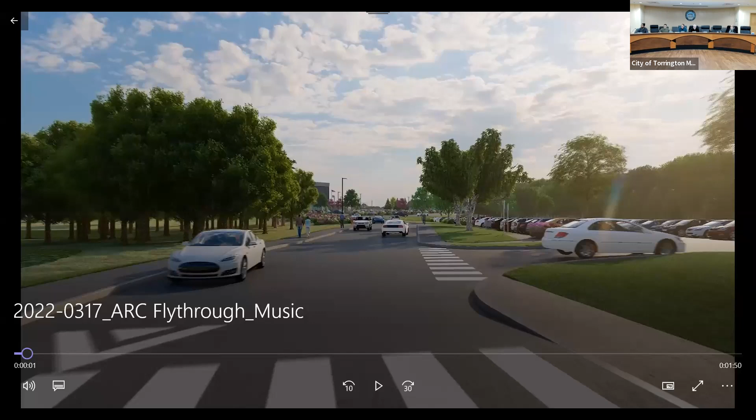So first, if I could, we'll play a quick animation showing the overview of the project. This is going to start at the entrance at Major Besse Drive, and then it'll fly around the building so that you get an idea of the project.

But before I do that, just to give you an overview, and I think you've seen the drawings, this is a building for the middle and high school, 7th grade through 12th, that will replace eventually the existing Torrington High School on the same site.

For the duration of construction, we'll be building the school in the parking lot of the existing high school, and then we will move, over a summer, the high school into the new building, demolish the existing building, and then complete the construction and renovate the site.

So we'll share some site plans. We'll get into details about stormwater management and traffic and plantings as soon as I share this video first, if you don't mind. Thank you. Okay.

The new building on the new site. The existing stadium field will remain and will be in use throughout the construction and remain in place after construction as well. And then we'll be adding to the school other amenities, including 2 baseball fields, 2 softball fields, and a multi-purpose field. And 4 tennis courts will replace the existing 4 tennis courts.

And there's an alternate for the project to do 6 tennis courts if budget allows.

Zooming in on the building, you can see the high school wing is the curved wing that faces Route 8 and Besse Pond. That wing is 4 stories with a partial lower level, which has access to the pre-K parking lot.

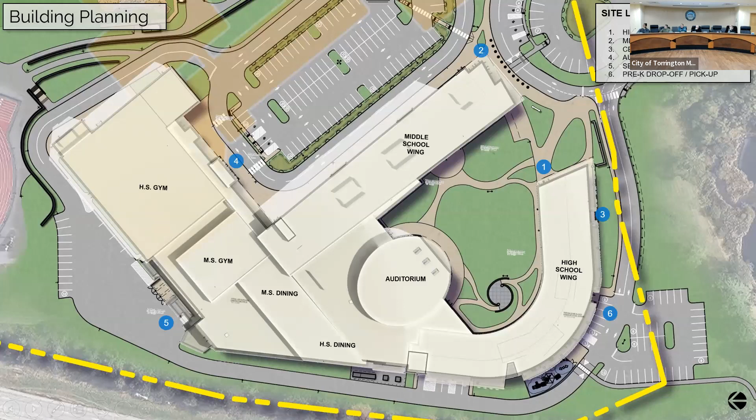Amy, I have a question - this is Diane Carroll. In both the middle school and high school wings, is it just all classrooms, or are there going to be shops, like the old Torrington High School has? Is there anything like that offered or going to be built? Sure, yes. The school has a robust program of pathways, and some of those are in the tech ed department, including construction technology, an engineering lab, some graphic labs and support spaces for digital design. The auto shop is also considered one of those tech ed spaces.

Is that just in the high school wing? Those are the high school ones. The middle school has 2 maker spaces and a digital graphics engineering area, kind of at a smaller scale. Okay, great, thank you.

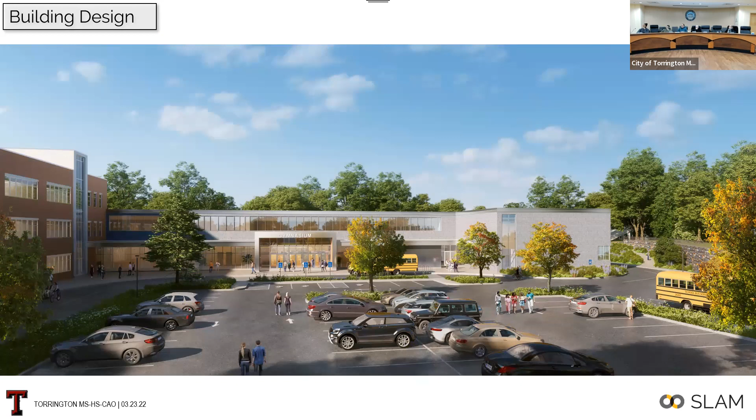This is an image of the gymnasium entrance or the assembly wing entrance. This is where the bus drop-off would let students off in the morning and pick up in the afternoon, but it's also where we expect visitors to come for basketball games, events in the auditorium, and that sort of thing—any kind of use of the building after hours.

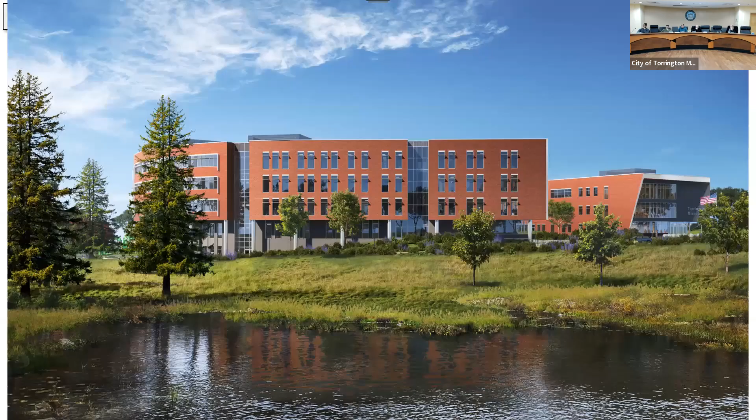This image is taken from Besse Pond, showing the full 5 stories because you can see the lower level of the high school there. Coming around the corner, there's an elevator and stair tower that serves the high school on that side. And this is an image of the middle school wing, 3 stories, a little bit intentionally smaller scale and only serving 2 grades.

Both academic wings are primarily brick exterior wall surface. We have some metal panel to highlight the entrances and curtain wall, as you saw. And then we have a polished concrete block for the gymnasium wing and around back, and also for the auditorium. So any questions on materiality? I do have an exterior material board that you're welcome to view.

Heavy. Amy, I have a question. Sure. Yes. Go ahead, Donovan. Thank you. Thanks, Greg.

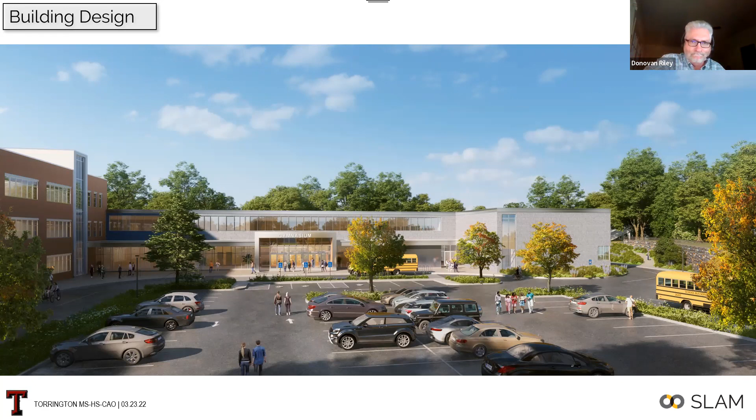Thank you. Thanks, Amy. Sure. Yeah, so I can turn over the presentation now to landscape and civil engineers, and they can get into more detail about the site. Please. Thank you, Amy.

Hi, good evening. My name is Henry Withers. I'm a licensed landscape architect in the state of Connecticut and a member of the SLAM Collaborative. I've been working with Amy and the design team and Will to help design the site. We've actually been working with Jeremy and the city staff as well on some of the logistics that we'll get into in a little bit.

Amy gave you a general overview, and I'm going to try to keep my overview to more of an executive summary as well, because you've already heard some of this, but I just want to make sure that you're aware of everything going on.

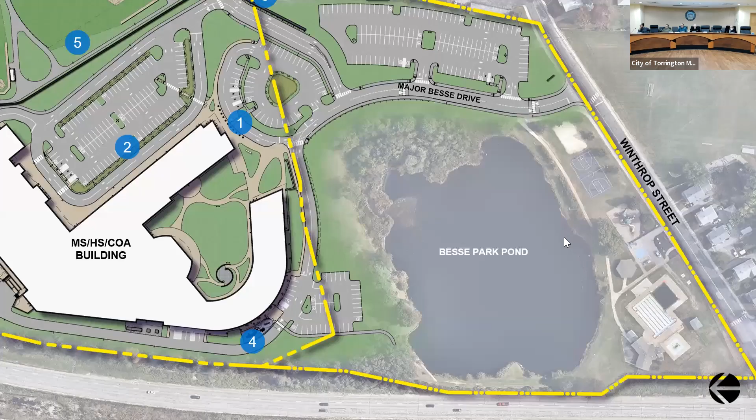It's about 6:30 where that number 4 is. We can see it. Yeah. There we go. Ah, beautiful. Thank you, Ken. Maybe I'm doing something wrong. This one, it's the red - there we go. Yeah, got it. So that's it right there.

So one of the nice things about this, as Amy mentioned, is we are looking at keeping the existing school open. Right now we're working with Jeremy and city staff, fire and police too, and ONG to understand how that's all going to happen. But we will be able to construct this project down in this location and keep the school open.

When it's done, the nice thing about this project is it consolidates all the athletic fields up above and keeps all the school facilities down below. Very nice connection to Besse Park. We have a nice greenscape along here that we're leaving sort of open, saving some of the existing large pines that are down in that area. That's again where the little playground is down there.

Service into the back, wood shop down here and the auto shop here, all sort of on the back side of the building, but very convenient and very useful locations.

The shared parking here is, as you know, there's two parcels, the Besse Park parcel and the school parcel, totaling around 34.94 acres. We are sharing some of the parking with Besse Park. This area becomes faculty parking, but also serves Besse Park, especially during the busier months during the summer. So there are crosswalks provided both here and here at this parking lot that serve both facilities. There's a sidewalk that connects on both sides all the way around, and then feeds into Besse Park.

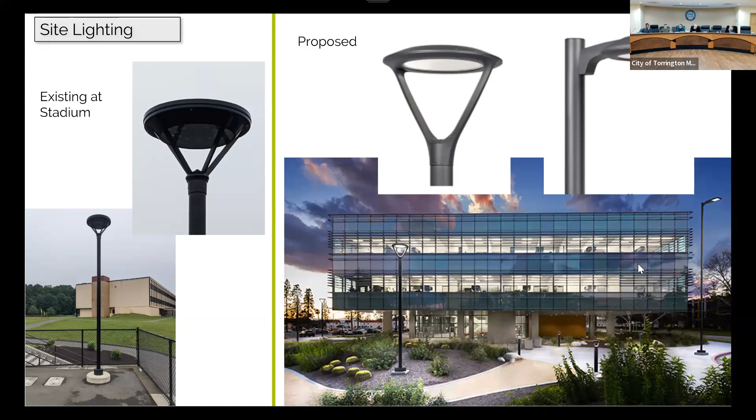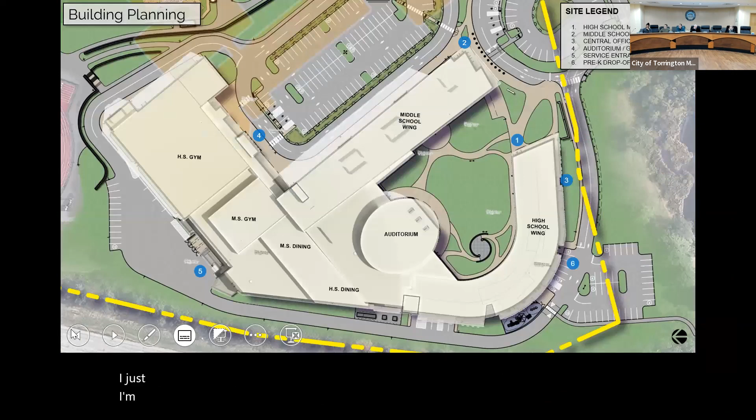I don't know, Amy, if you want to bring it up on one of the site plans—I think you probably saw it in the fly through. It's located on the mound, that little orange dot right there. So that way it'll be seen by a number of people coming into the site, every morning by the buses coming in and dropping people off.

Another question, yes sir. You have a lot of roof—did anyone consider solar?

Yes, while it's not afforded by the project, we're planning to put enough panel capacity and locations for inverters on the building and conduit in place. Our engineers have come up with the KW capacity, so that'd be like a separate project.

That's really not going to be able to be part of this. It could be a separate project, or a PPA provided by the solar company. But it's not going to be part of the actual—the funds to do that can't come out of the building funds. Correct, right. But structurally, the building is set for that, the added load and so forth.

Absolutely. And you've communicated with the Department of Energy on potential future projects? The state has several different programs which the governor has been working on towards green buildings, making sure we're meeting the state's energy efficiency goals. As part of the state project and funding requirements, we are meeting the equivalent of LEED Silver, which is what the Connecticut High Performance building requirements are, and we're proceeding with that.

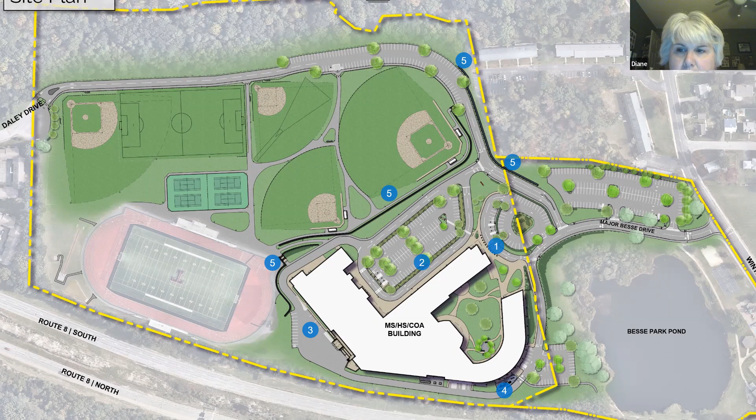Like not so much a community garden, but raised beds? Yeah, actually, we just discussed that, and that's something we'd love feedback from the building committee on. We could certainly - the idea came up - do a victory garden. We've done that in different schools, and it depends on the teacher taking care of it as to whether it becomes a weed bed or a garden. But it's certainly a possibility, and maybe there's a better location for it where the flexibility and how much it's used won't be as critical.

This will be fairly used space and a nice viewing area from all the classrooms, as well as - it's graded in a way that lets people sort of sit on an embankment and look at presentations. The ARC was interested in us leaving this middle part open. We're going to shift some of these trees out a little bit so we could leave the middle part open, so that if they wanted a larger white tent or something for an event, they could do that. So we see that as a really useful multi-purpose space where any kind of event could take place that the school might want to offer, even to Acorn Ballet or whoever, as a possibility for presentations.

Quick question - thank you - for Amy. In the design, is there like a maintenance garage, if you will, or maintenance section for plant maintenance, so to speak, for outdoor maintenance and so forth?

There is, for mowers, et cetera - there's an outdoor equipment storage room which would be able to house some outdoor maintenance equipment, but primarily outdoor athletic equipment. I see, so that's easily accessed. The loading dock and custodial storage areas are also easily accessible from outside. Thank you.

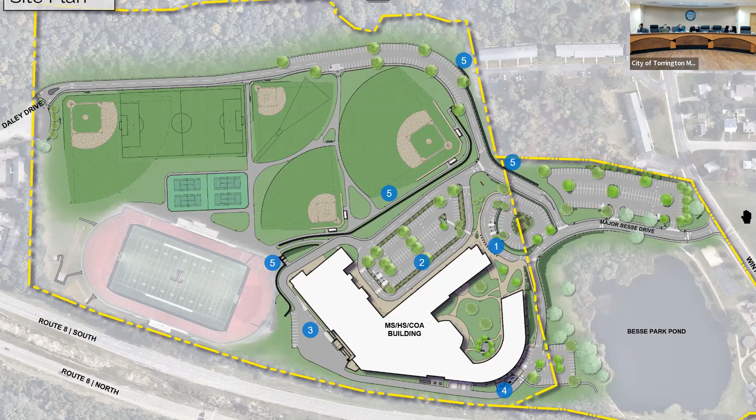Thanks, Amy. Good evening, commission members. For the record, Will Walter, professional engineer with Alfred Benesch and Company.

So the site topography generally slopes from east, which is the top of the page - there's Ruland Street up at the top in the residential areas, that's the high point. It comes down, going east to west, and eventually all the stormwater is discharged. There's a pretty large drainage swale that runs along the Route 8 right-of-way, on the highway side of the fence that separates the school from the right-of-way.

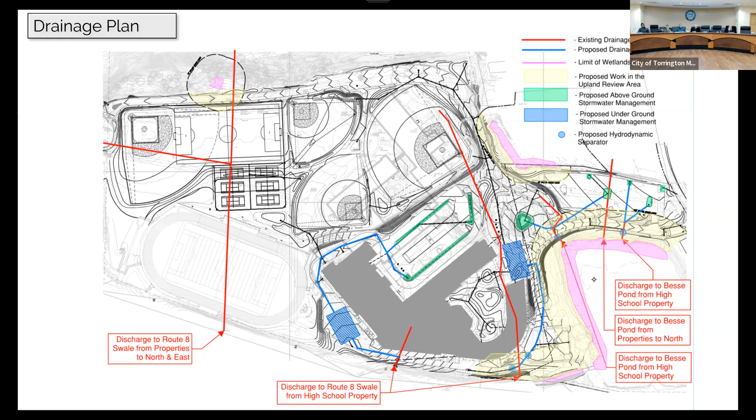It's that button right there. I honestly couldn't see it when you were pointing, so I don't know if it was going to be helpful.

There are two large pipes collecting flow from off the site that run underneath the site. One of them, the dark red line on the left side, collects flow from the Ruland Street subdivision as well as the subdivision to the left. It comes down and collects in the 36-inch pipe that goes underneath the field and then dumps out into that swale on the right of way. We're not touching that pipe, as it's conveying flow from off-site underneath the high school property and into the right of way.

And then on the southeastern part of the site, there's the little apartment area and then the roadway system to the north. There's a large, I think 54-inch culvert that goes underneath that parking lot and dumps out onto the bank of Besse Pond and goes into Besse Pond. We're not touching that pipe either, as there's nothing from our site that gets into that pipe.

The flows from Besse Pond come down and there's an overflow weir that, during larger storm events, overflows and gets into a swale that drains down into that large swale in the right of way. There's also two other pipes - pipe networks on the site that dump out through an 18-inch pipe and I believe a 24-inch pipe down into the swale as well.

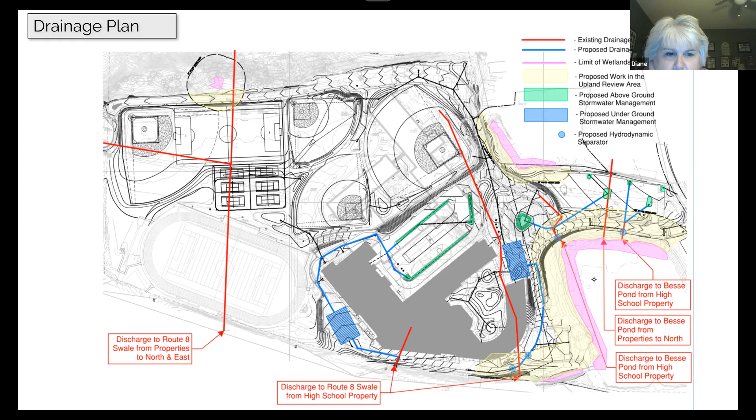I'm just thinking of the tennis courts. If those start to flood, is it going to deteriorate the material? No, those tennis courts are not going to flood.

So I guess just to focus in on the questions we had for the wetlands, can you zoom in on that, where that red pipe comes down and empties into the pond? You can see where that basin is, into Besse Pond, that's what we wanted, what we asked to get adjusted.

Yeah, so that's an older plan, but that's been adjusted, so close to that existing pipe. We have adjusted it, I just wanted to point it out to the commission.

So what we're doing is not the large 54-inch pipe, we're not touching that, but there's several other pipes that collect water from that parking lot and dump into Besse Pond. Right now it's completely untreated, the water flows over the parking lot with the pollutants and dumps out into Besse Pond. So what we're doing is we're maintaining the last 15 feet of pipe, but we're dropping hydrodynamic separators, which are swirl chambers, on those pipes so the untreated water is not going to flow through. It's going to be captured in the swirl chamber, and then clean water is going to come out.

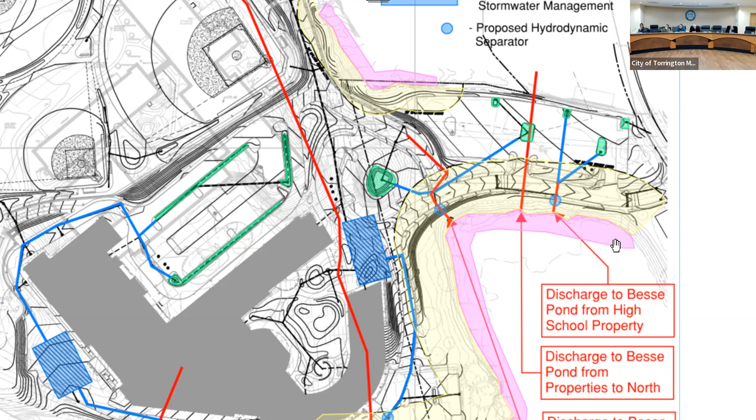Any other commissioners have any questions at this point? I've got a general question, maybe for Amy, Greg. Go ahead, Donovan, if that's okay.

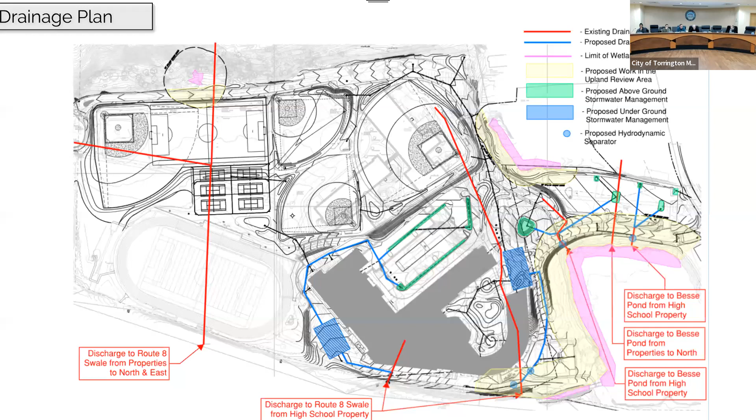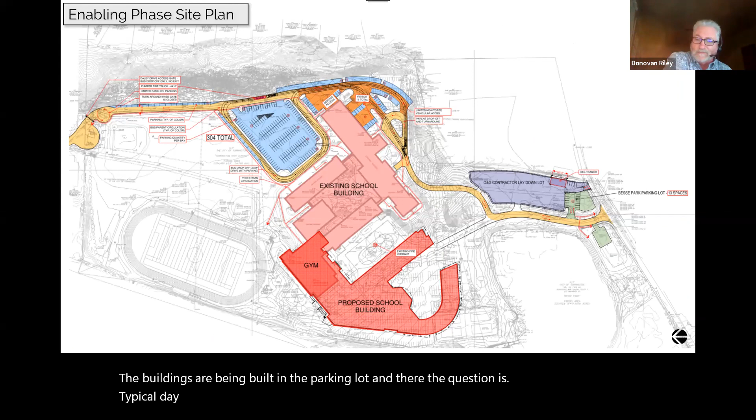Forgive me if this question's been asked at previous hearings, but what's the plan for maintaining an environment in which the existing students, teachers, administrators can continue to conduct their business while the buildings are being built in the parking lot? What's a typical day going to be like to use the facilities during the construction of the other parts? I know a lot of it's going to happen during the summer, but what's the timeline look like in that respect? And what's been built into the plan that is going to allow the teachers, students and administrators to continue to conduct business while the other construction is happening right next door?

Right, good question. And I pulled up a different site plan, the enabling site phase plan, which helps show the condition of the site during construction. If you can imagine the dark red new building under construction while the pink existing building is in use.

So we are trying to separate, or we will absolutely separate, the construction activity from any school activity. There will be fencing, unfortunately not shown on this graphic, but between the construction area and the existing building. That construction fencing will be in place immediately starting this summer before construction begins, and it will delineate the difference between the construction area and the school.

O&G, as the CM, will also put into place a number of security measures, including background checks on all of the contractors, each individual from each subcontractor. And they will implement badging systems so that only background checked personnel is on site. But even those folks will be required to stay within the construction fence zone.

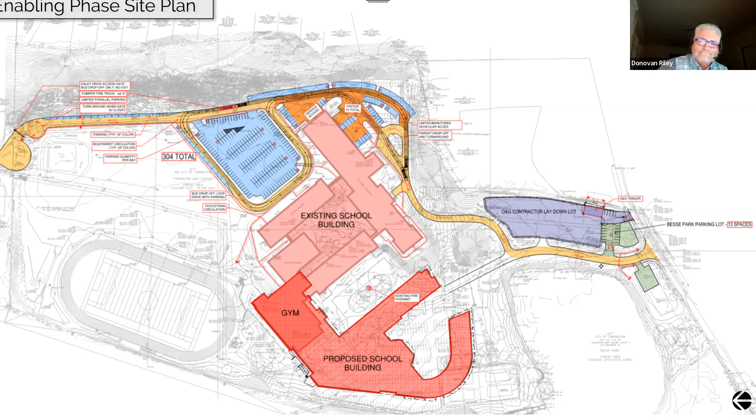Great, let's move on. Thank you, Amy. So I think we have a traffic presentation that we want to include that was a part of our submission to you. Thank you.

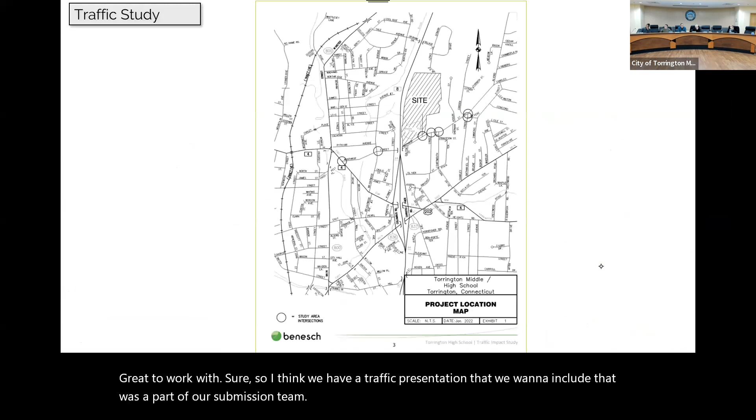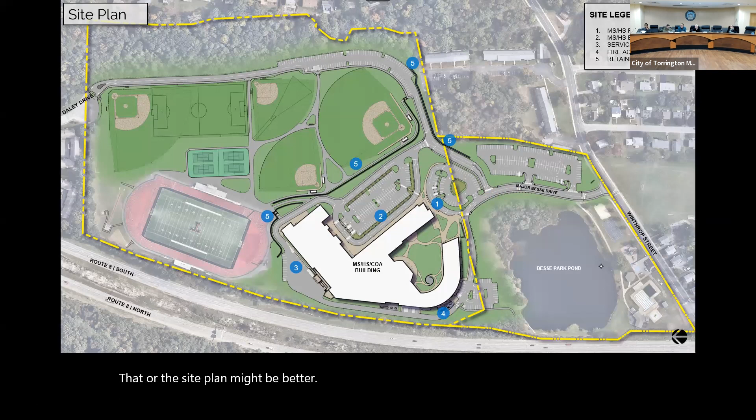Good evening. My name is Steve Allman. I'm a professional engineer in the state of Connecticut. I'm the traffic engineer on this project. I'm employed by Alfred Benesch and Company. We did the traffic study for this development, the new high school and joining of the middle school and the high school.

As you know, the high school is currently located off of Major Besse Drive, which is accessed via Winthrop Street. In the vicinity of the site, Winthrop Street is classified as an urban collector roadway. At Major Besse Drive and Winthrop Street, it's a three-way stop control, one lane in each direction for each approach. At the other side streets along Winthrop Street, the side streets are stop controlled and Winthrop is generally a through movement. There are a couple of all-way stops in the vicinity of the site. Speed limit on Winthrop is 25 miles an hour in the vicinity of the school.

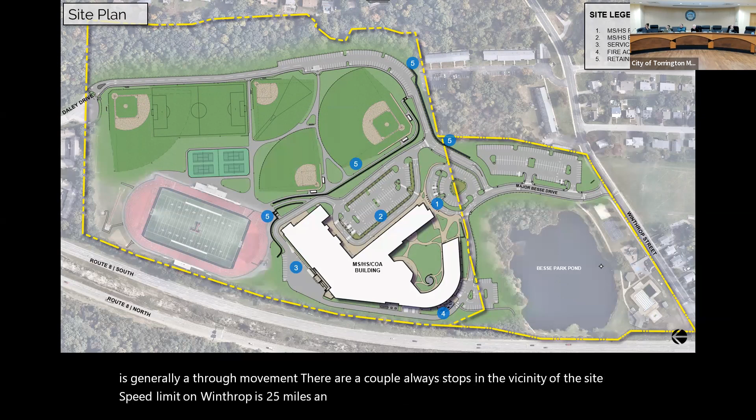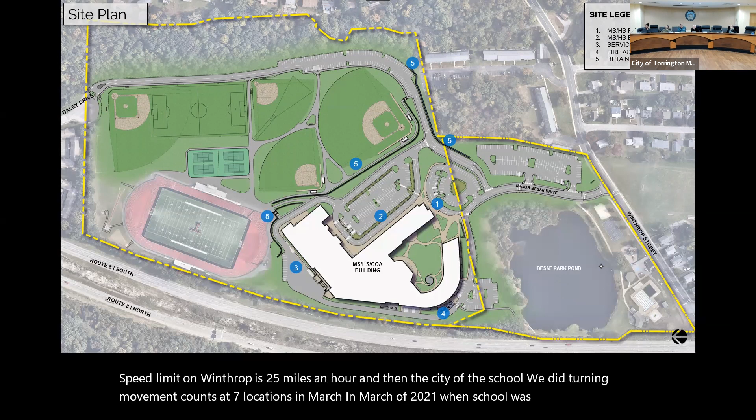We did turning movement counts at 7 locations in March of 2021 when school was in session. The locations were Winthrop at Major Besse, Winthrop at Amherst, Winthrop at Dartmouth, Winthrop at Charles, Charles at Revere, Winthrop at Brightwood, and Winthrop at East Elm. We also did 24-hour counts on Winthrop in the vicinity of Dalton Street. I'll get to that in a second.

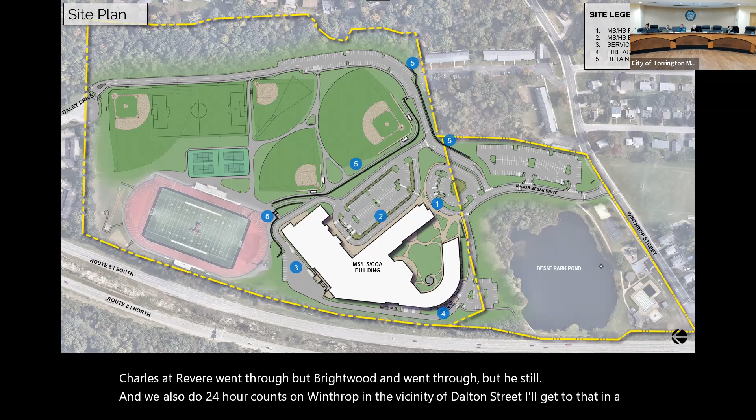We also reviewed the latest crash data from January 1st, 2015 through December 31st, 2020.

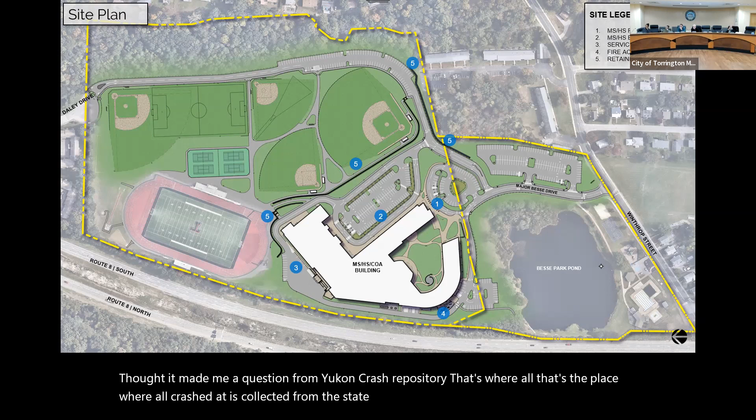From the UConn Crash Repository, that's the place where all crash data is collected from the state and collated. Review of that data shows there are no crash patterns along the streets in the vicinity of the site or at the intersections studied that would indicate a geometric or any improvements are required.

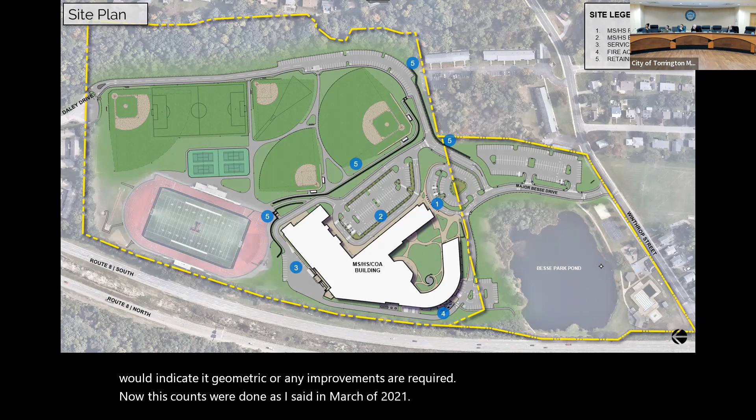Now, these counts were done, as I said, in March of 2021, still suffering the effects of COVID, the pandemic. During the pandemic, we know that traffic volumes have been reduced due to changes in traffic pattern, people working from home, et cetera.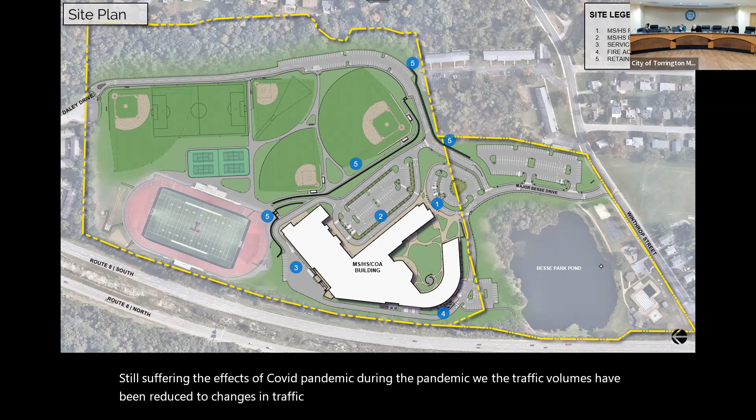Comparing the counts, the 24-hour counts we did on Winthrop Street and the DOT counts done in 2018 along Winthrop Street, we find that we need to take those 2021 counts and expand them by 7.2% to equate to the old 2018 counts. So we were 7% lower than 2018. By increasing those volumes by 7.2%, we came up with 2021 volumes adjusted to pre-COVID numbers.

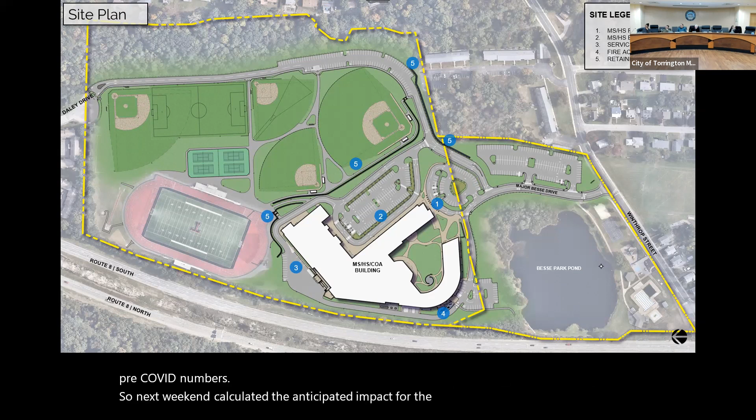Next, we calculated the anticipated impact by the school. The school impact new trips is going to be generated by 3 different components. First, they're anticipating an additional 137 high school students than are there presently now. We are moving the middle school, grades 7 and 8, to the school, and we're moving the school administrative offices to the site.

We calculated those new trips. For the middle school, we actually counted the middle school. So the number of trips that I have anticipated is for the full middle school, which is a bit conservative because that's 6 through 8, and we're only moving grades 7 and 8.

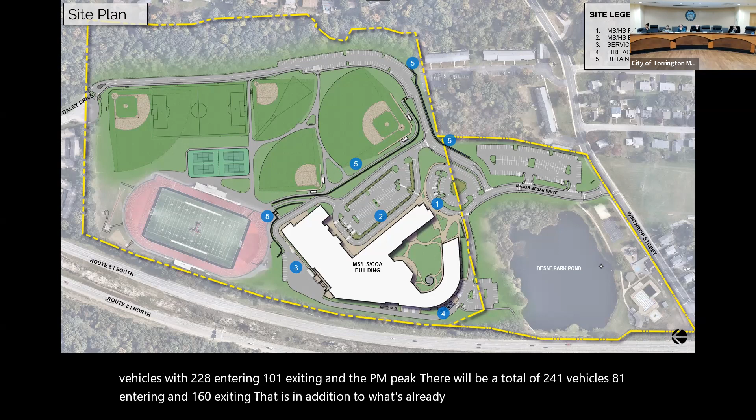The anticipated number of new trips to the roadway network by this project is, in the AM peak, 329 vehicles with 228 entering, 101 exiting. And in the PM peak, there will be a total of 241 vehicles, 81 entering and 160 exiting. That is in addition to what's already out there on the network going to the high school today.

As I stated, these are conservative because they include the full amount of trips being generated by the current middle school, but we're only moving grades 7 and 8. Therefore, this creates a conservative, or worst case scenario, for the school.

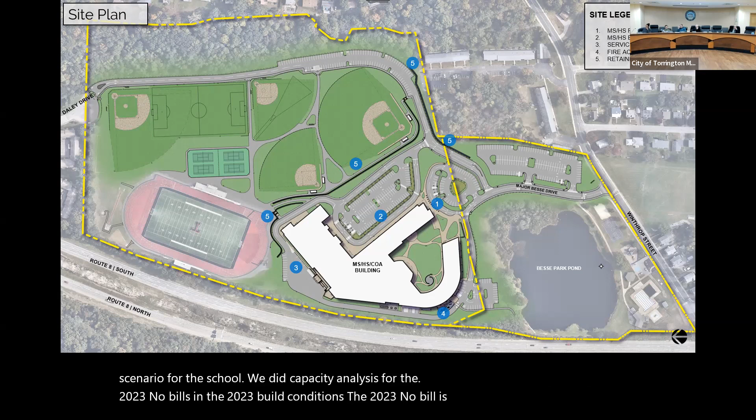We did capacity analyses for the 2023 no build and the 2023 build conditions. The 2023 no build is the amount of traffic we anticipate on the roadway network in 2023 without the school being improved. That would be, we go to 2023, we don't build a school. What's the traffic level there? That was calculated by taking those 2021 adjusted volumes and increasing them by 1% per year for 2 years.

And the 2023 build volumes are those no build volumes, adding those generated trips I just told you onto the roadway network.

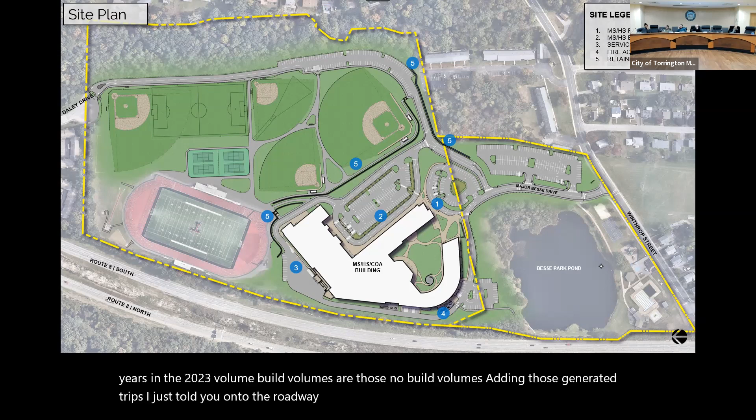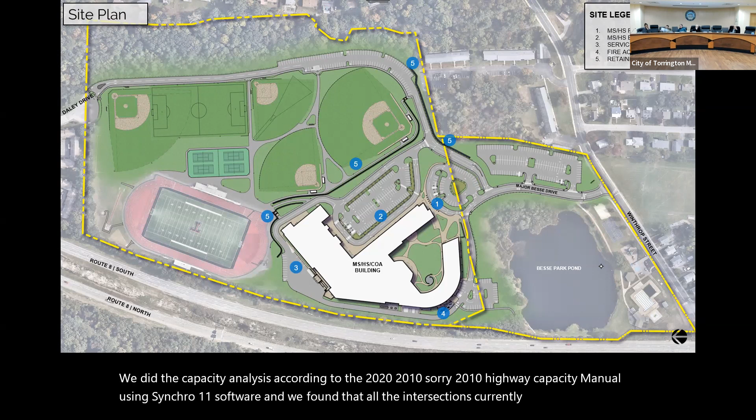We did the capacity analysis according to the 2010 Highway Capacity Manual using the Synchro 11 software. We found that all the intersections currently operate, and in 2023 will operate, at a level of service C or better with no build volumes, and will continue to operate at level of service C or better with the build volumes. All of the side streets will continue to operate at acceptable levels of service.

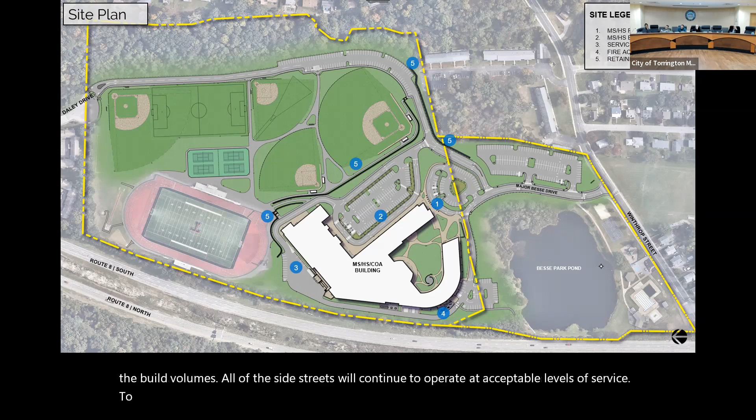To note, the Major Besse Drive to Winthrop Street is analyzed as a single lane approach. We're not creating 2 lanes there. This was based on a field meeting we had with the traffic lieutenant.

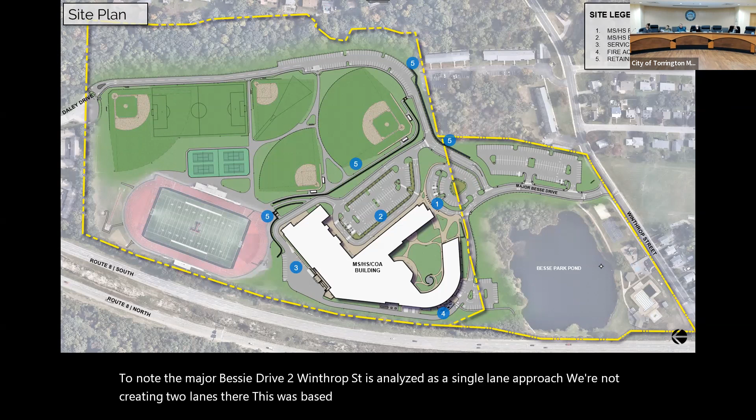He had concerns, as I do, about making that exit drive 2 lanes. We have a school bus on one side, a car on the other side. You can't see, even though it's a 3-way stop. It will operate acceptably as a single lane exit.

So that is what is proposed. That road is one way out. Major Besse is 1 lane out, 1 lane in. Okay, so it's just single lane exit, like it is today. Correct, no change from today.

There was discussion of buses. You're gonna have buses coming in that way. In the final condition, the majority of the buses are assumed to use Major Besse. Probably a half, maybe a third of the buses are assumed to use Daley. So you haven't considered having it more exclusive, the site being more exclusive regarding bus traffic.

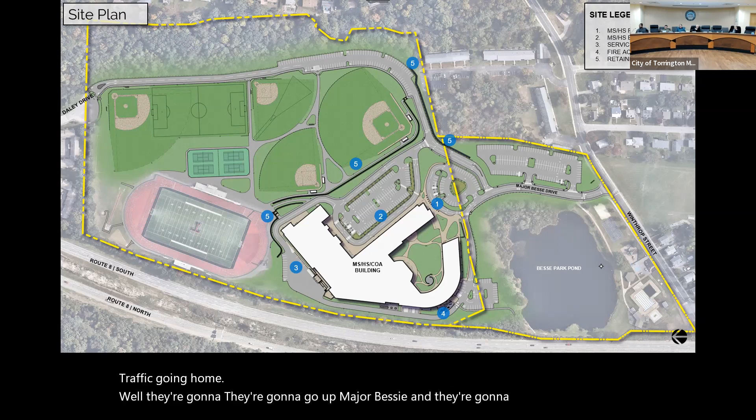In other words, keeping bus traffic away from parent traffic or student traffic on site. You have Daley Drive in the back. Well, they're going to go up Major Besse and they're going to split. I see, that's exactly what you'll have to do. Yeah, split.

But the big concern I have on this is I'm looking at it, and I'm sitting there saying, if buses are going to access through Major Besse Drive, then you're going to have the same issue as you had indicated, you have these trucks or buses blocking view, and they're competing for the same access to the building as parents, and also students.

That's as it is today. I'm asking if that's the way it's going to be. I know how it is today. My concern is what's the plan for the actual site movements once the buildings are finished and you've got it all done.

I don't know if this plan is for everyone to enter. The majority of the buses and the parents will enter here. The parents will come up here and use this loop here. And the buses will continue to loop around the school the same way.

How many buses are going to be coming, and exit at the same time? Let me just interject just for a moment, because it may clarify. Maybe answer the question: is the high school start schedule the same as the middle school? Yes.

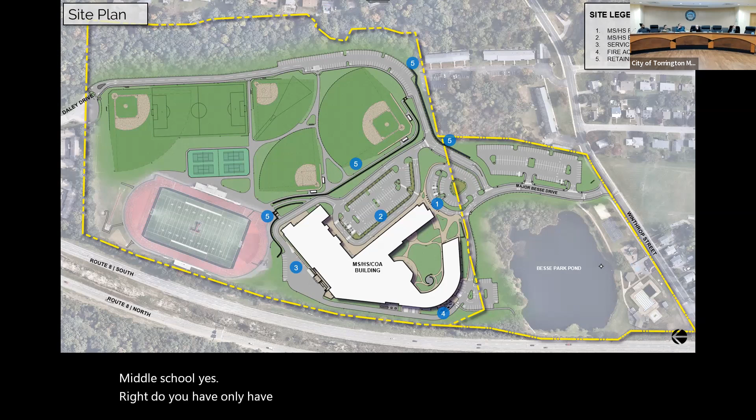That being said, we have everybody coming at the same time. Okay. You only have one cohort of buses. I apologize, just to say my name for the record.

Ed Aram, Torrington resident, 43 years. I look young, Ed says.

Yeah, majority of the buses will be coming in on Daley Drive because on the east end, there may be 5 to 10 buses that will come through. Right now, as you know, all the buses come through Major Besse Drive. When this is built, the north end and the west end will be able to come through Daley Drive.

And only probably 10 buses will be coming through on Major Besse Drive, exiting back out that way. Well, that I don't know yet. Okay, but I know that the majority of buses, because they're on the north end and the west end, will come through Daley Drive. So the plan, Ed, is that the north end and west end will come through Daley, and then the east end will come through Besse.

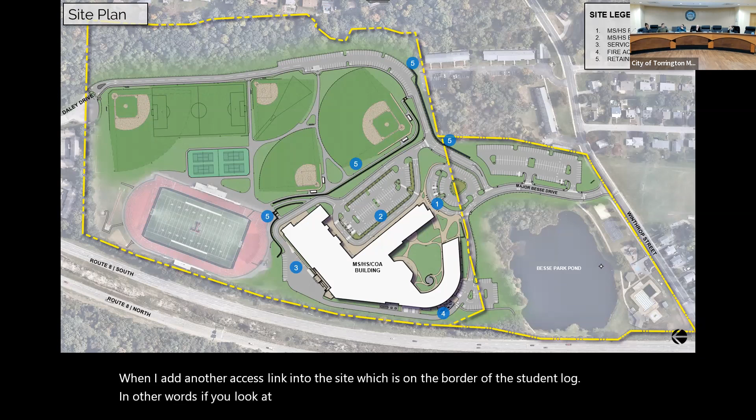Correct. I had one thought, and when I looked at the site plan, the first thing that jumped out at me was, why not add another access lane into the site, which is on the border of the student lot? In other words, the first lot coming in from Besse, where the skate park is.

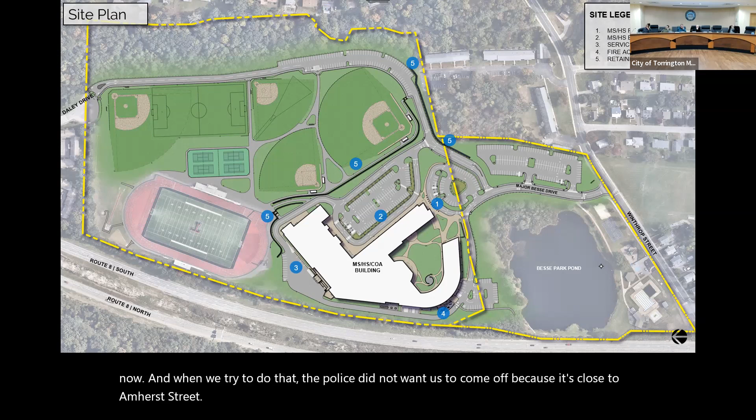If you were to encroach on that a little bit and put in a bus lane, that bus lane shoots right into where it's got to go, no turns. If there's a lane there now, when we tried to do that, the police did not want us to come off because it's close to Amherst Street. So they didn't like the intersection. We wanted to do that, we wanted to have that lane there.

Excuse me? I thought you had more influence in that. Yeah, maybe if you looked younger.

We tried to do that. I looked at that as a huge improvement to the circulation. I know buses take a direct shot into where they've got to go, but because of Amherst Street right there, it was too close to stop, and one of those staggered intersections. Not a good intersection.

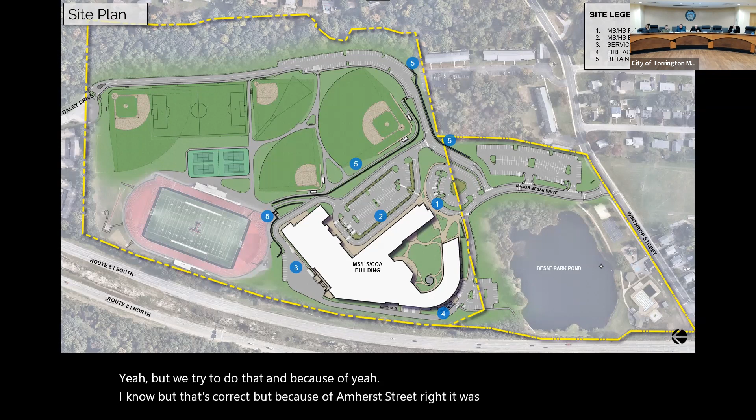The other issue that the police chief and the traffic lieutenant had was people building up, having gathered speed coming down the hill, and not having enough time to stop. That was really the reason we had our field meeting. We had originally proposed the two driveways and they didn't want it, and so that's where this came up.

I'm just trying to get the bus traffic away from the car traffic as quickly as possible on Besse Drive. I would look to split that Besse Drive off sooner rather than wait till you get to the circle. Although the other issue we're dealing with on the site is we're limited on where we can put parking. I understand. It really is, for the size of the site, and it looks like a large site, it's really tight to get all the program into it. I'm sure the administrators will try to solve it as best as possible.

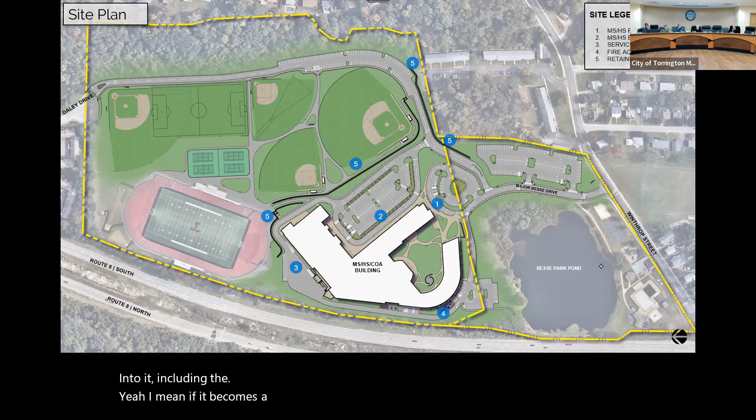If it becomes operationally a problem, they can certainly put all the buses onto Daley. They're going to do it during construction, if that is operationally what is best for them. It's not as efficient, it's an option. Certainly efficient for the east side, but it doesn't, it's not as efficient for the west side.

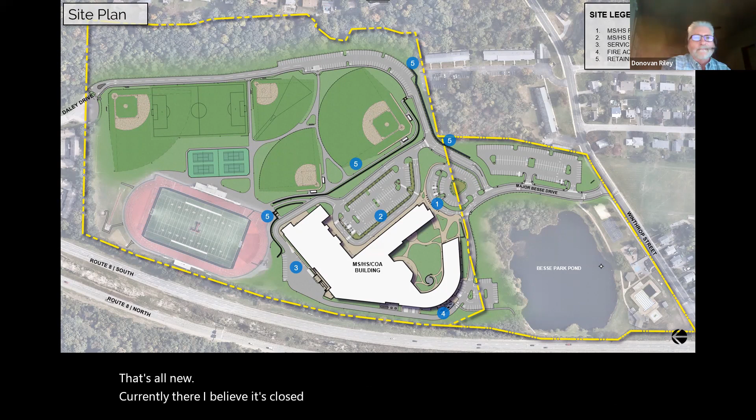Donovan, did you have a question or comment? I just, the Daley Drive entrance, that's not active now, right? That's all gonna be new? The Daley Drive is there now, currently there. I believe it's closed at this point. There's a fence across it right now.

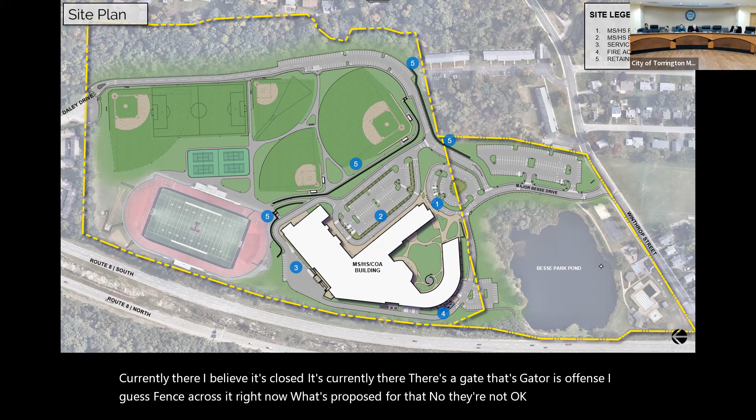So nobody's proposed for using that now, right? No, they're not. Okay, so after it's all done, we're gonna have a lot more buses coming in through there. So they're not all gonna come in through Major Besse. No, well, probably at least half or more. I've been informed we're coming in through there. That will be gated, actively gated, so that only buses can use it. If you're driving a car back through there, you're not gonna be able to get through it.

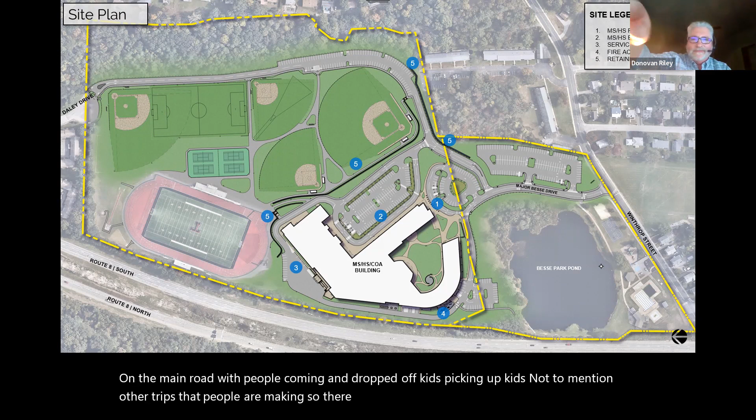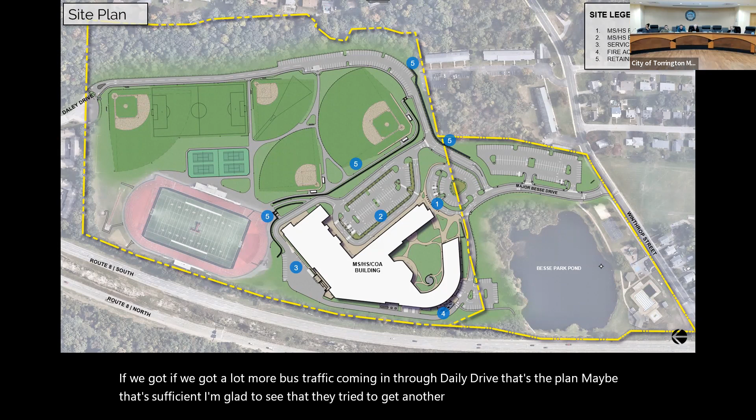Does that address a portion of your concern, Greg? Yeah, I'm glad Ed clarified that the administration is gonna look at trying to minimize the bus traffic coming in from Major Besse Drive, because there's too much competition on that main road with people dropping off kids, picking up kids, not to mention other trips people are making. The concern previously was that hill, you could theoretically get a backup that would still affect the ability to stop on the side of the hill. That's a heck of a hill. If we've got a lot more bus traffic coming in through Daley Drive, maybe that's sufficient. I'm glad to see they tried to get another road in. I'm happy you at least attempted to see if you could get that done, and obviously you can't, but.

So that is one benefit of the site, that you have that flexibility. If they find they need to use Major Besse for some of the buses, they can. Obviously dating myself, but when I used to park in that parking lot as a student, there was an exit there directly out, and I think it's still there.

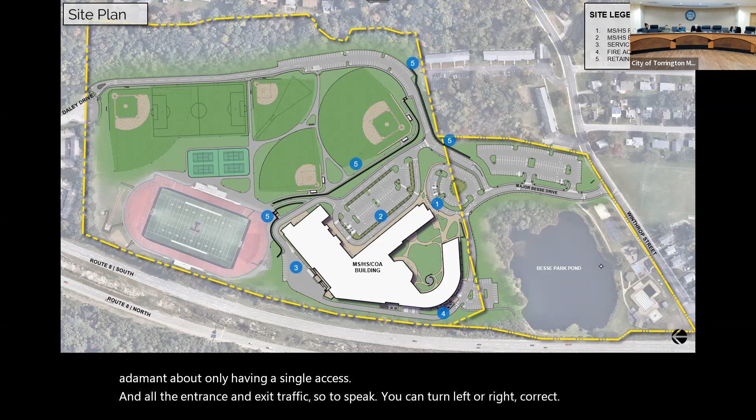So I guess maybe that's one of the reasons why the police department would like you to cut that off too. Yes, they were adamant about only having single access. Okay, that's fine, I get it. And all the entrance and exit traffic, you can turn left or right leaving the site. It's a three-way stop as it is now, I guess it was changed a couple of years ago.

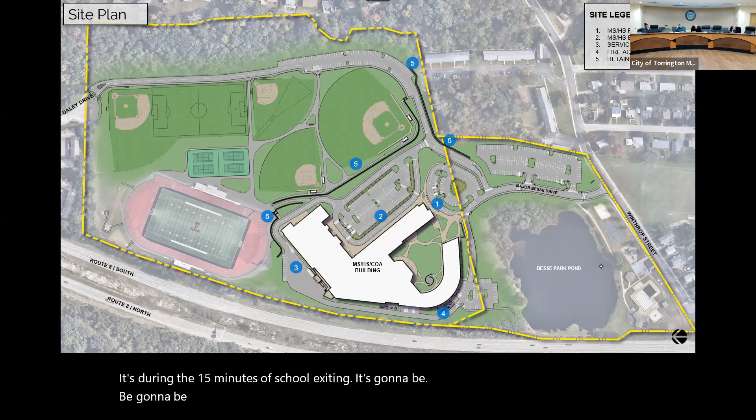Has anyone ever thought that there might be a reason why you might need to direct traffic at that corner at any point in time, based on the counts coming through? During the 15 minutes of school exiting, there's going to be backups, a lot of traffic, but it's only going to last 15 minutes. It's an all-way stop, so it should be self-regulating. The analyses show that the queues won't be significant.

Maybe you can get a policeman to direct traffic if needed. I'm sure they'll be notified if there's an issue, though it'll probably be overtime.

Any other commissioners have any comments or questions? Okay, I'll still be here. Thank you, sir. Amy?

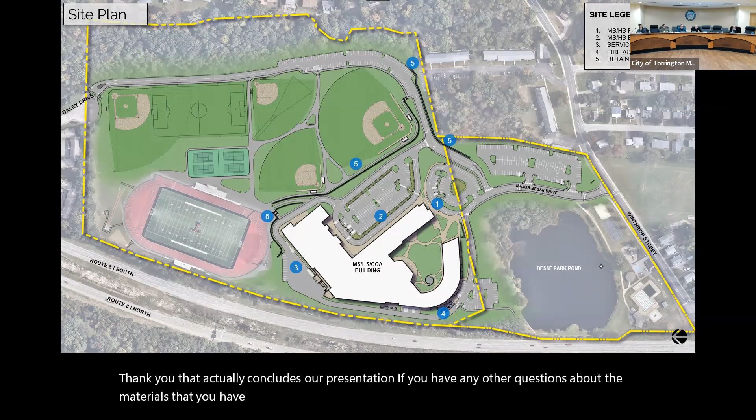Thank you, that actually concludes our presentation. If you have any other questions about the materials, or would like me to review anything, let me know. We kind of did the enabling phase, which is during the construction phase, midway through. Right, okay, thank you.

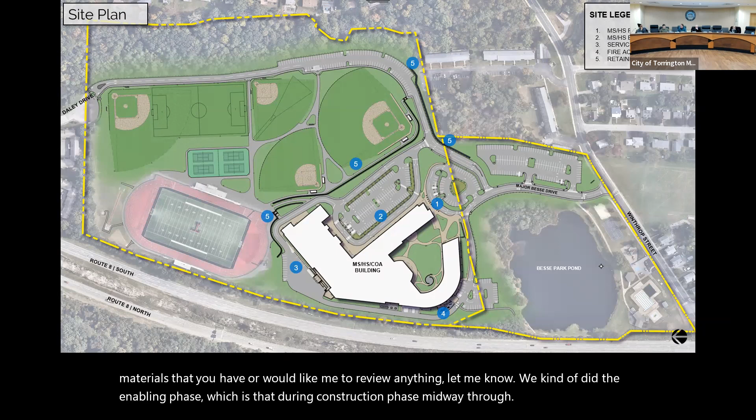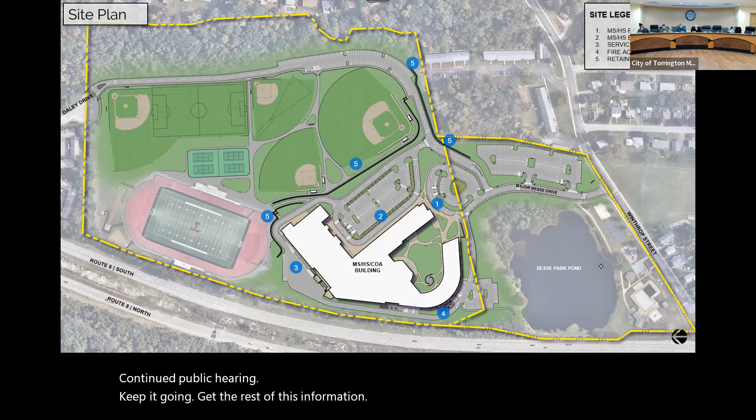Jeremy, a few comments please. As we can see, this is a fairly large, involved project, so we still have a couple other boards. I did distribute a draft memo that I started to put together, but we are waiting for complete reviews from the city engineer, the police traffic sergeant, the fire marshal, WPCA, and the building official still. That being said, Jeremy, I think it's conducive to continue the public hearing and keep it going, get the rest of this information presented at a follow-up meeting. Yeah, that'd be my recommendation.

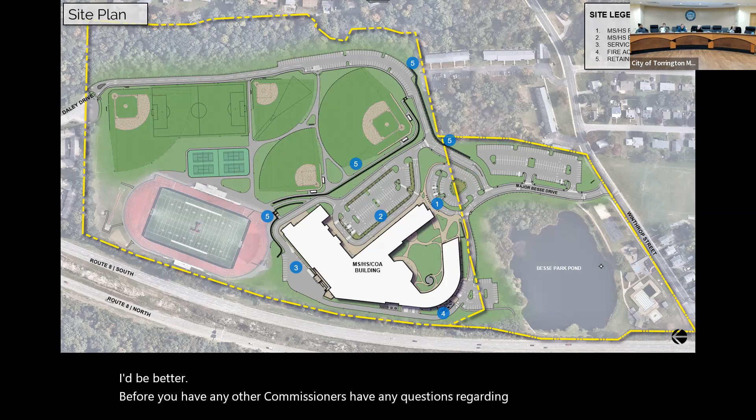Before we do that, any other commissioners have any questions regarding the information proposed this evening? I think the only thing I'm thinking about is with Daley Drive is the impact to that small condo community that's right behind it. I don't know what we're going to face when the buses start coming through there. So it's just something to keep in mind, you might have some pushback there.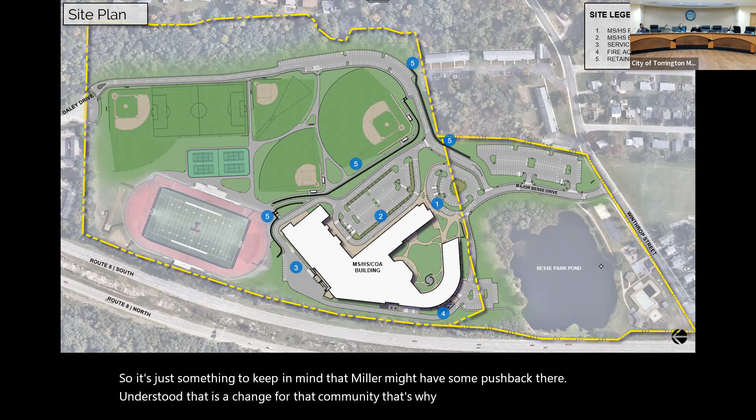That's a good point, Star. Understood, yeah, that is a change for that community. That's why we're going to be very careful about the timing of the gate. The gate at that Daley Drive entrance will be controlled by the automated building system, and it will be unlocked only for probably a half-hour duration, in the morning and then again in the afternoon. Otherwise, there will be no through traffic.

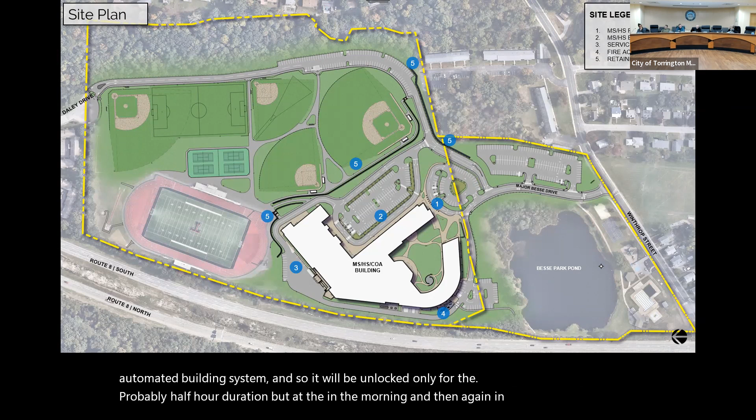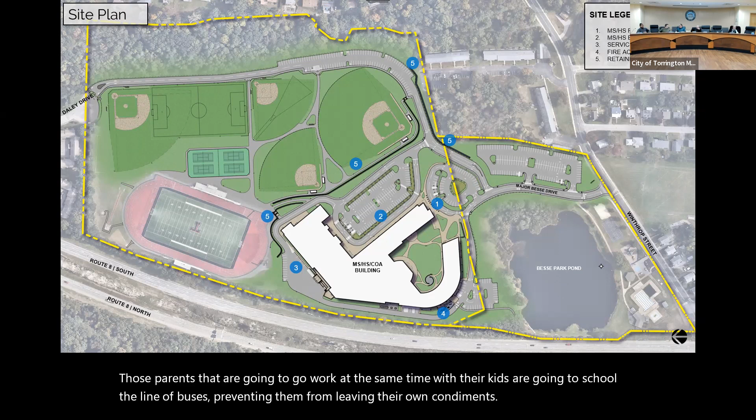So we hope to impact that neighborhood as little as possible. We're currently in a telework environment where everybody's working from home, but as we start moving back to the offices, those parents going to work at the same time their kids are going to school, the line of buses could prevent them from leaving their own condos. The nice thing about this site is I don't think there will be a line of buses in the community at all. That gate will be open and there's a nice long drive along the western side. There will be no traffic of buses in the neighborhood because there's such a queue on site.

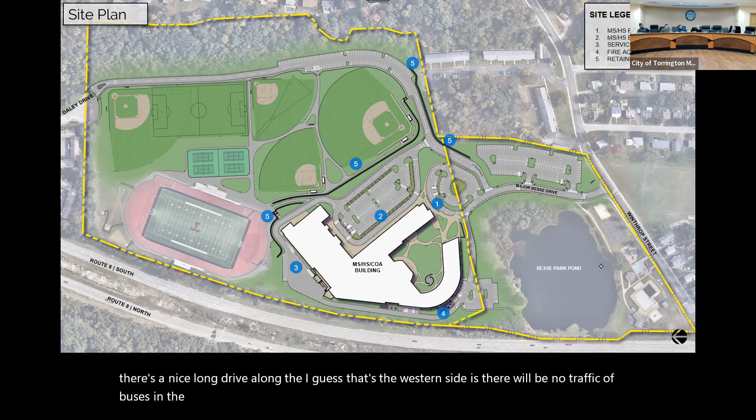So at least that is a little relief for them as well. For your next presentation, could we potentially include that into the map as well so we can see what that traffic will look like behind Daley Drive? Sure, I'll zoom into it now.

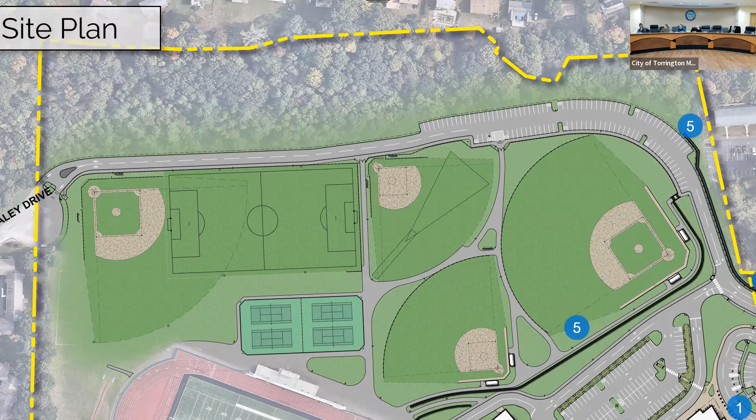You can see the scale, a 10-foot parking space is on your right-hand side. And the number of buses that can come in all along Daley Drive, go through that loop of parking area next to the baseball field, and then come down along the bus loop. There will actually be far more space needed than is required, since there's less than 20 buses.

Yeah, the only issue here is not the stacking. You have tons of stacking, that's never going to be the issue. No, I think what Star was talking about is if you can look at the site where those apartments or condominiums, whatever they are.

That site has the continuation of the road, which doesn't see bus traffic today. Now all of a sudden, they're going to be seeing bus traffic, not only during construction, but as permanent access to the site.

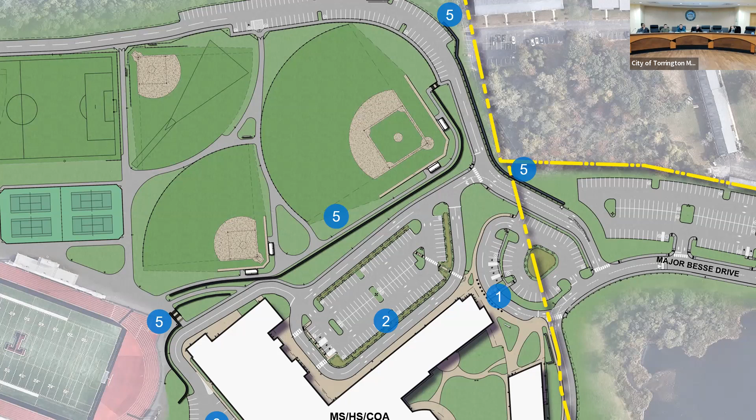So I think Starley's concern is, well, what's that going to do? Is it going to raise hell? Not that they're going to be stacked into the site, because they won't. There'll just be regular traffic driving through.

The other thing to consider down the line is likely those buses are going to come out at relatively the same time on either College Ave or Northridge, so it's not going to be an easy interchange to get back out onto Winsted Road during those times. Just something else to consider.

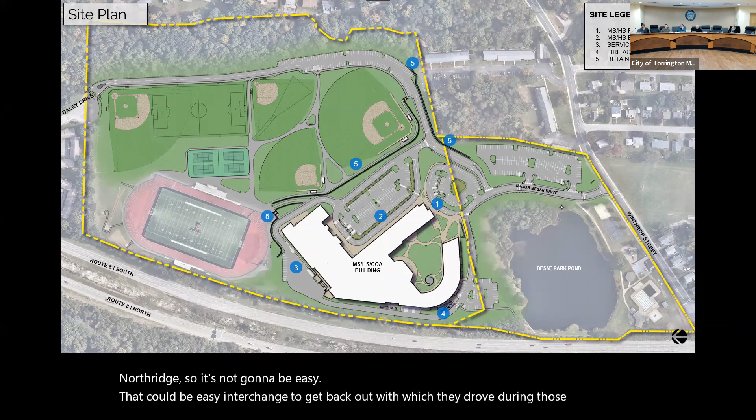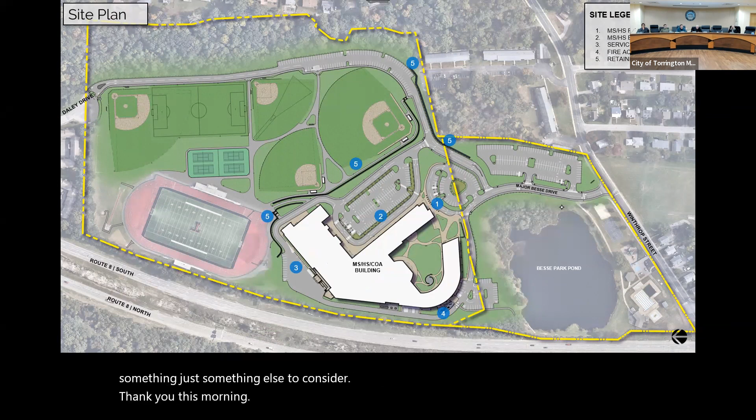Would anyone like to speak in favor of this application? Please come forward and state your name and address for the record. Being none, would anyone like to speak in opposition? If so, please come forward, and that includes the Zoom members. Being none, the time is 8:33.

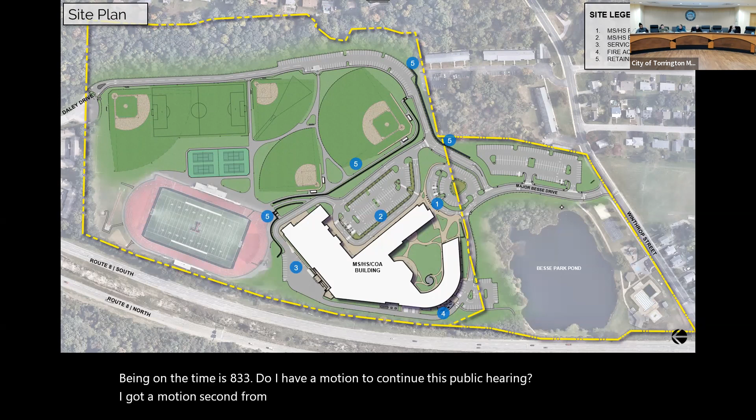The time is 8:33. Moving on to agenda item number 4B, proposed zone change, applicant Michael Leonard, location 2865 Winsted Road. Proposal to change zone to local business, LB. It's currently zoned R15S. Is the applicant in attendance, please?

Please come forward and state your name and address for the record. 2865 Winsted Road. Michael Leonard, 22 School Hill Road, Goshen, Connecticut. Were the green cards sent out, the mailings to the neighbors, and a sign posted? Yes. Okay, thank you, sir.

Please give us an overview of what you're looking to do, sir. Looking to sell used furniture and used household appliances and whatnot out of the location. Okay, and currently that zone is residential, you're looking to get it into the local business zone, correct? Correct. And what proximity is this? This is the old Burrville Firehouse, correct, sir? Yes, so it's across the street from Zach and Lou's. Correct.